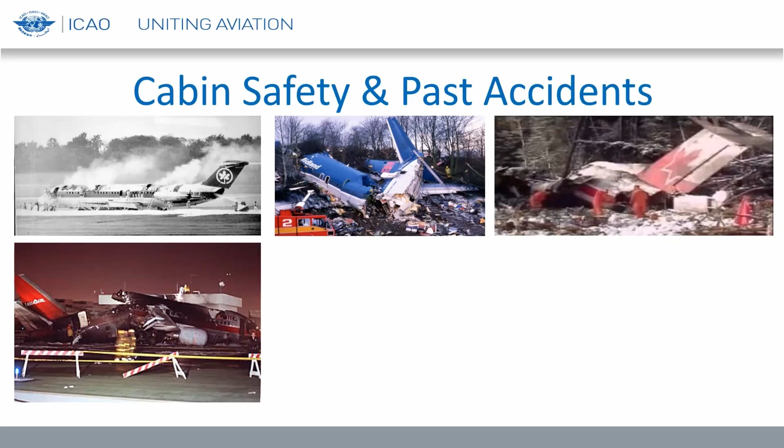2005, and a 737 which failed to pressurize due to maintenance issues. As the aircraft climbed, the cabin altitude warning horn sounded. The flight crew misidentified the warning as a takeoff configuration warning and attempted to troubleshoot. Meanwhile, the oxygen masks in the cabin automatically deployed, and it is presumed that cabin crew became aware of the decompression. However, the aircraft continued to climb, and both flight crew members succumbed to hypoxia. The aircraft continued to fly on autopilot until it suffered from fuel exhaustion and crashed, and there were no survivors, and the aircraft was destroyed.

It should be noted that cabin crew are, or should be, trained to know that a decompression is followed by a rapid descent. The fact that the aircraft kept climbing should have been a clear indication to them that there was a problem. In fact, the investigation concluded that one of the factors that could have contributed to the accident was the lack of cabin crew procedures to address events involving loss of pressurization and continuation of the climb despite oxygen mask deployment. As a follow-up to the accident, EASA issued Safety Information Bulletin 2009-33, which recommends that operations manuals should be reviewed and amended to address such procedures. And number 6, please.

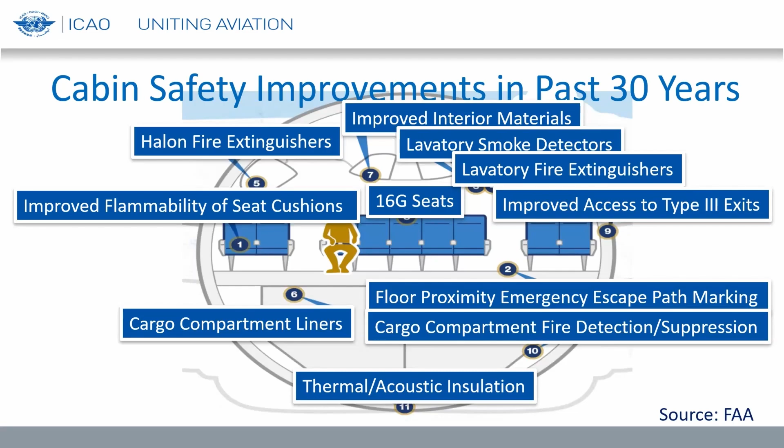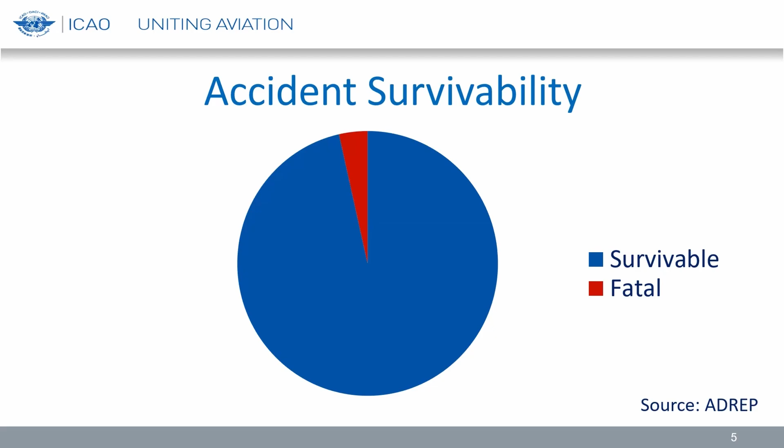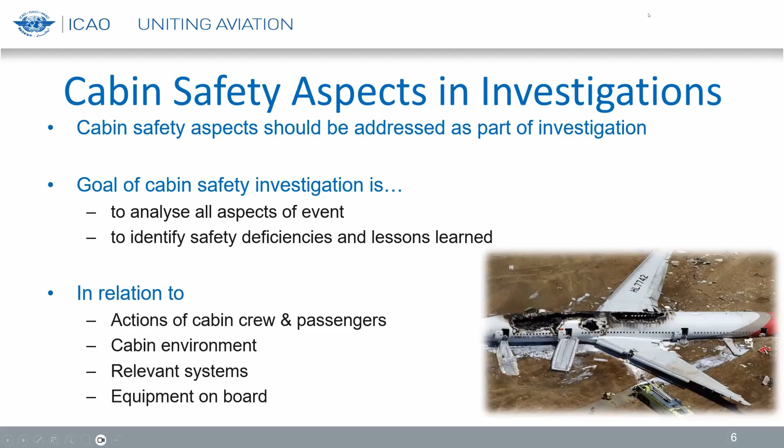So, the cabin safety aspects and investigations. Cabin safety aspects should be addressed as part of the investigation. Approaching an investigation using a systems approach encompasses all affected areas of an investigation, of which cabin safety is an important element. And the analysis of cabin safety related aspects can provide valuable insight into issues such as systems engineering and design, human psychology, human factors and all of its subfields such as ergonomics and biomechanics, human performance and limitations, human cognition, behavioral psychology, organizational psychology, learning psychology, and more relating to cabin crew, passengers, the aircraft and its systems and equipment, and any limitations.

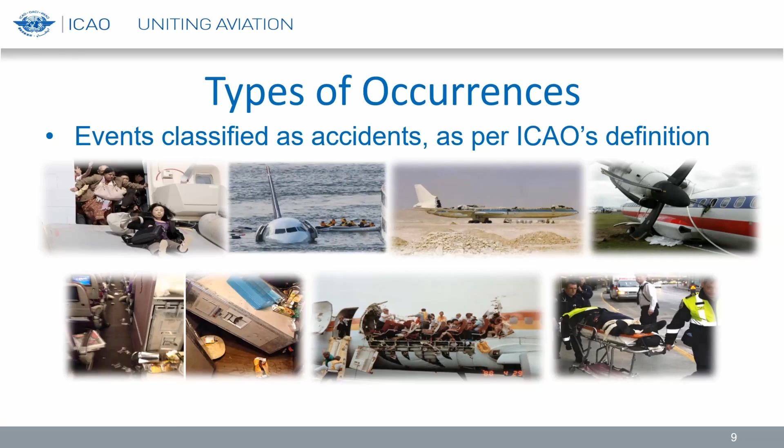So documentation refers to the occurrence specific documentation from the following sources. So this is the collection of the relevant documentation from the operator, the state of the operator, and other sources. For example, the aerodrome where the accident occurred. Next slide, please.

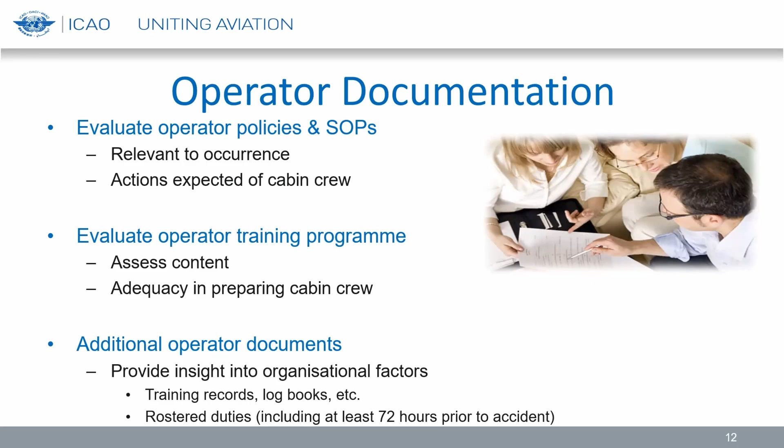The document also relates, in terms of operator documentation, the need of the cabin investigator to evaluate the air operator policies and the standard operating procedures. So this would be documents relevant to the occurrence and actions expected of the crew. So the training programs, for example, the evaluation of the operator training program to assess the content and the adequacy in preparing the cabin crew, and additional operator documents, which may provide insight into organizational factors such as training records, logbooks, and the rostered duties. Next slide, please.

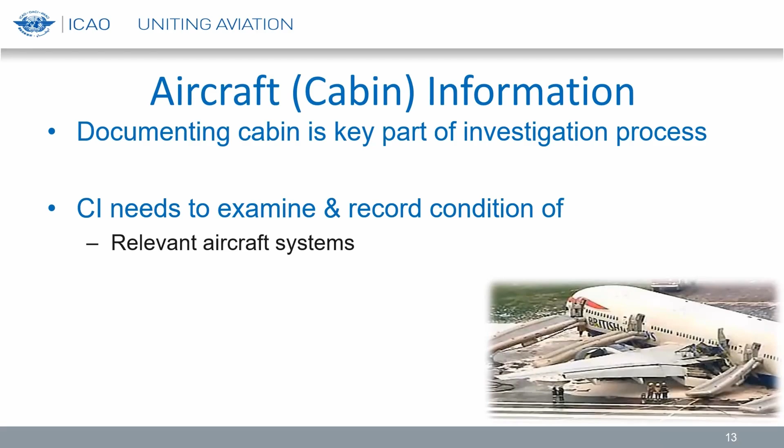In terms of aircraft cabin information, this is the collection and the documentation of the cabin as a key part of the investigation process. So the cabin investigator needs to examine and record the condition of the relevant aircraft systems, safety and emergency equipment, and the cabin in general. And we'll move to the next slide, please.

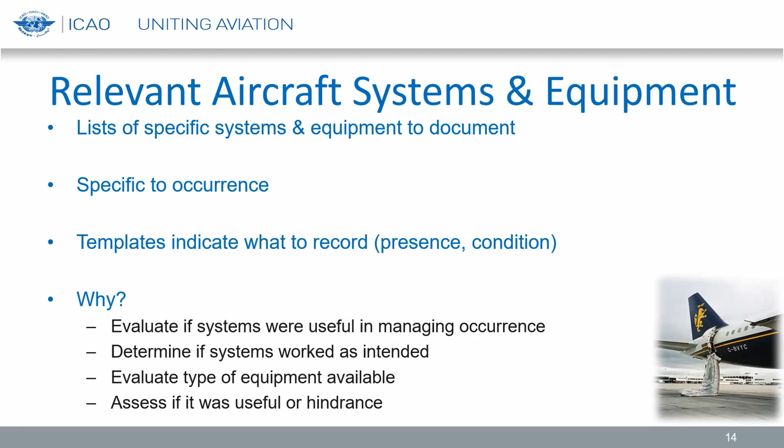And in terms of the relevant aircraft systems and equipment, this chapter lists the specific systems and equipment to document, the specific information related to the occurrence, and the templates of what to record, such as the presence and condition, and why. And the why part is to evaluate if the systems were useful in managing the occurrence, determine if the systems worked as intended, evaluate the type of equipment available, and assess if it was useful or a hindrance.

So the analysis should focus on the reasons for failure, damage, or malfunction of structures, systems, equipment, and/or components, and evaluate how they affected the ability of the crew members to carry out their duties and responsibilities, and the survivability of occupants involved in the occurrence. And this process may require testing of parts. And the question that's often asked is, did the equipment or system operate as intended? Next slide, please.

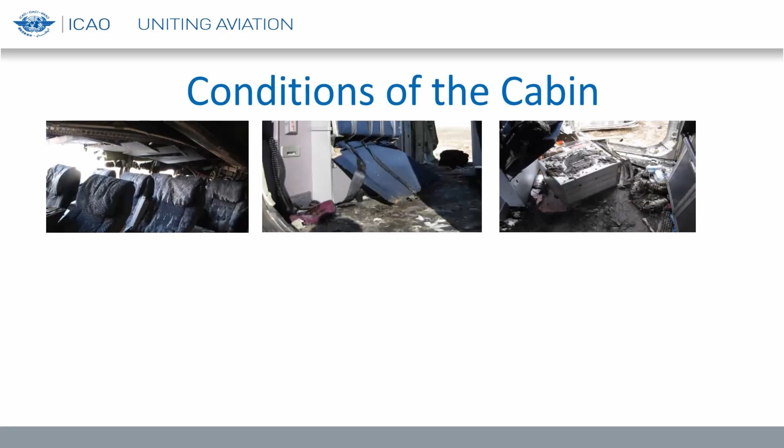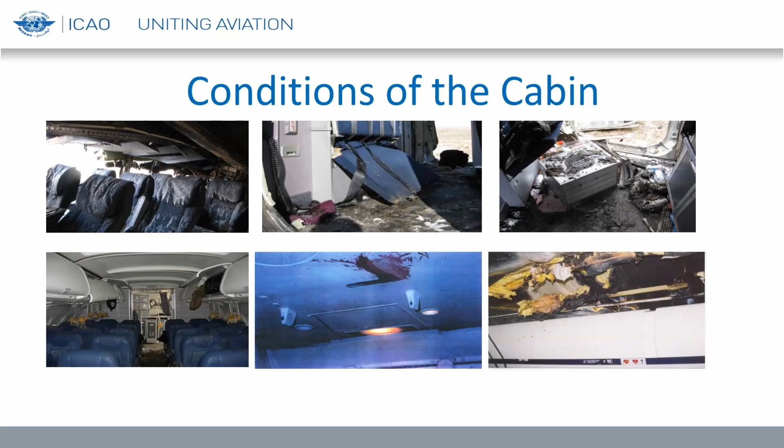The conditions of the cabin. For the conditions listed in the cabin in Doc 10062, the cabin investigator should record the presence or condition, if there were failed or damaged components, serviceable, and/or if the components worked normally, and the part and serial number of any affected equipment as well. And again, the reason why is to evaluate the reason for failures or damage of that specific piece of equipment or system, how this impacted the survival of occupants, how it may have contributed to injuries, and whether or not the system or equipment affected the ability of the occupants to evacuate. Next slide, please.

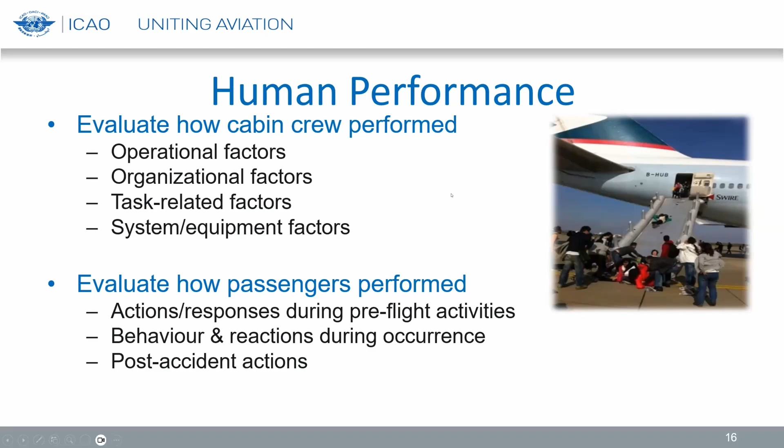So human performance evaluates how the cabin crew performed and how the passengers performed. So the operational factors include aspects such as the cabin crew's knowledge of systems and equipment, their experience level and proficiency, crew compatibility, supervision, command, and control of passengers' action, and then the passengers' actions and responses during pre-flight activities, for example, whether the passengers listened to safety briefings or actually took out the safety feature card,

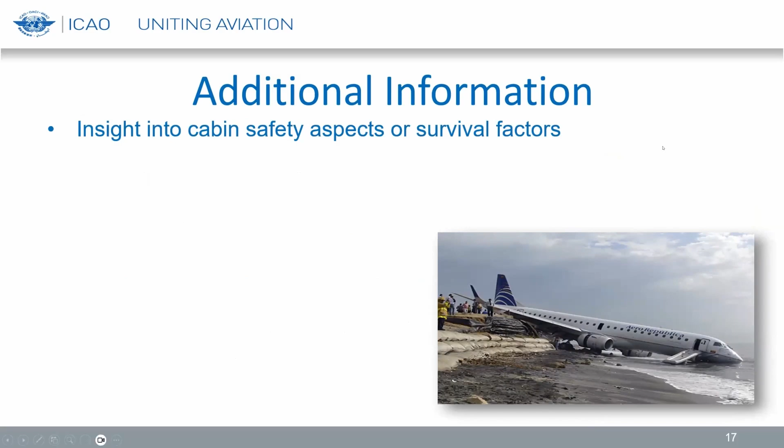the passengers' behaviors and reactions during the occurrence themselves. And one of the previous examples at the beginning of this presentation was the fact that passengers ended up taking their carry-on baggage and subsequently slowed down the evacuation process. Any difficulty that passengers had in opening exits, getting to exits, and post-accident actions, such as responses to instructions from personnel, such as rescue and firefighting personnel.

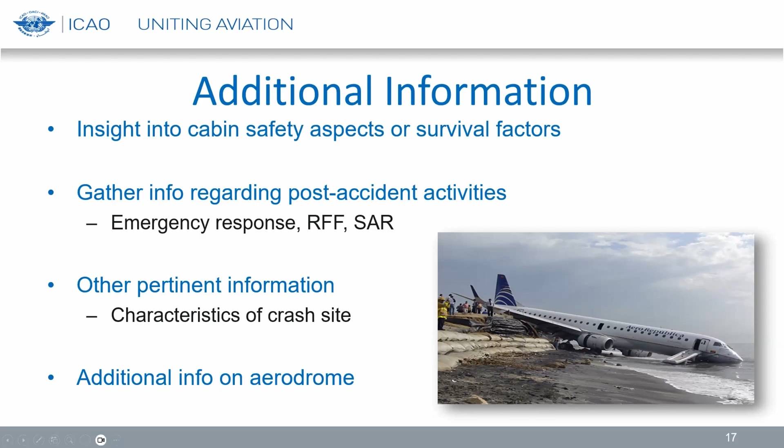So, additional information. The purpose of any additional information as the underpinnings of the investigation process is to gather any insight into cabin safety aspects or survival factors. So gathering information on the post-accident activities. So this may be emergency response, search and rescue. The analysis should examine how, for example, the rescue services responded to and managed the occurrence. If search and rescue operations were undertaken following the accident, the analysis should also focus on the operations, the response, and how the incident was actually managed as well.

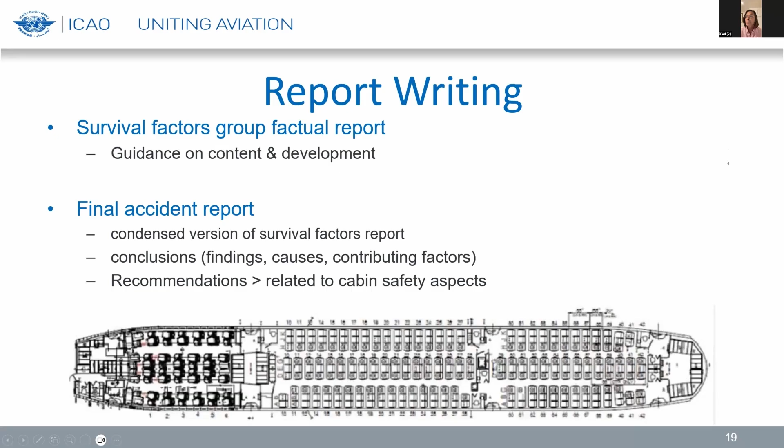And the document also contains how to write the report, what should be in the report, and the process for the actual drafting of the report as well, and the fact that it needs to be factual. I'm cognizant here that this is taking a little longer than we originally planned, so I'm going to keep moving. And then finally, this document also contains a complete chapter for operators on incident investigation.

So this chapter focuses on investigation of incidents which do not meet the ICAO definition of an accident and may not require a formal investigation by the state of occurrence. But incidents can provide evidence of hazards or deficiencies within the aviation system and should not be overlooked. And there are several examples of these provided in that chapter as well.

And next slide, please. So as I wrap this up, I thought I would end by closing with the words of one of my mentors. When I originally started in aviation, I came in as a flight attendant and then started at Transport Canada as an inspector with cabin safety standards. So some of the names today, I'm like, we've been around a very long time. And one of my mentors when I started, her words are actually on the Transport Canada website as well. And I thought I'd end with that, the summation of cabin safety's goal.

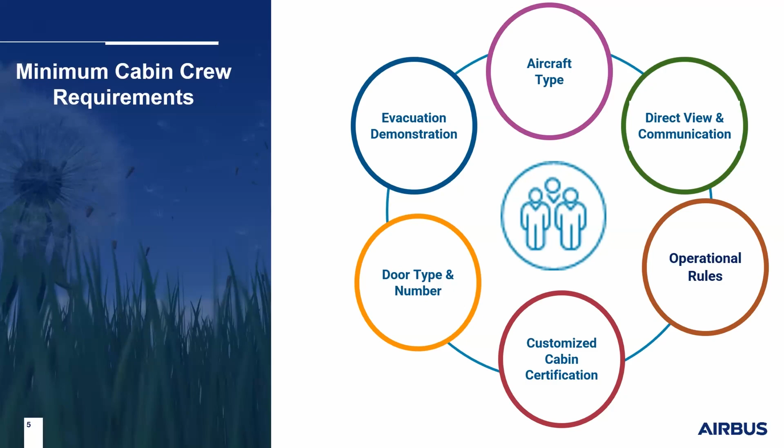Can you move forward again?

Thank you. For the type certification, the TC, Airbus has to demonstrate that an aircraft can be evacuated within 90 seconds, in accordance with EASA CS 25.803 emergency evacuation. This evacuation demonstration is performed with the minimum required crew for the cabin and the cockpit, based on the type of the exit and the maximum number of passengers distributed in the cabin. The maximum seating capacity is, of course, limited by the available space in the cabin and by the type and the number of exits.

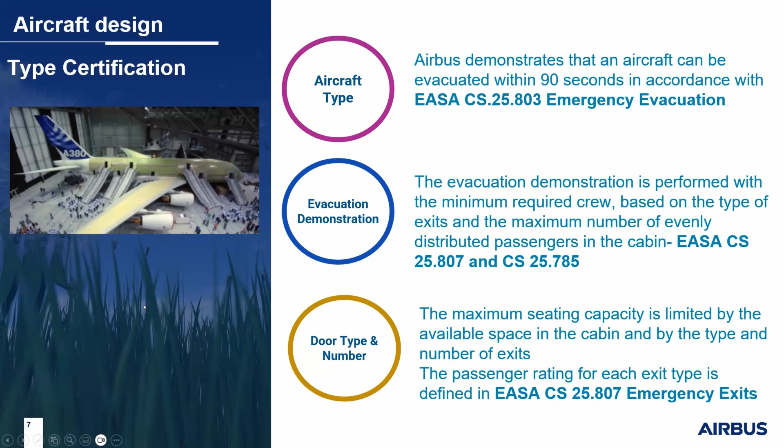The type of door may also influence the minimum number of cabin crew. As an example, for type A exit, one cabin crew must be positioned in the cabin attendant seat, the CAS, adjacent to the exit, so they can reach the exit before any passenger. For type 1 exits, it's slightly different. One cabin crew must be positioned in the CAS installed next to the exit.

When the aircraft is certified, as a result of the TC, the type certificate, the aircraft is provided with a type certificate datasheet, the TCDS. This TCDS will record the maximum passenger seating capacity for a given model or aircraft, and as well the minimum cabin crew as it has been demonstrated during the evacuation demonstration.

Next slide, please. As you may know, aircraft cabins can be highly customized. So, during the customization process, the operator should select a cabin layout that complies with the TCDS. What does it mean? That means that the number of passenger seats must not exceed the approved maximum number of passenger seats, and the number of cabin crew must be equal to or above the number approved during the type certification. We will see that in certain cases, the minimum cabin crew may be higher than the number defined in the TCDS, and this higher number will come from the individual cabin certification.

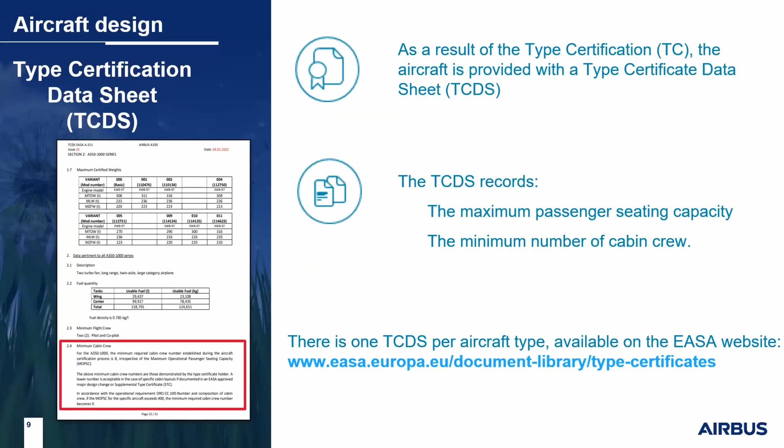Can you move forward? I think we swapped two slides. Can you go back, please? So, sorry for that. Can you move forward? Okay. Sorry. Okay, can you move forward? Sorry for that again.

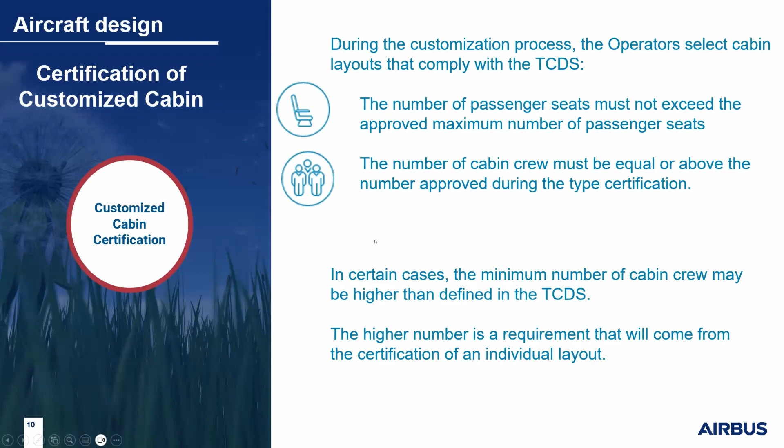In addition, there are certain items installed that may require amendments to the regulation, and these amendments are also published in the TCDS. As an example, additional cabin crew may be required, which will increase the minimum required cabin crew. This is the case, for example, for type A+ exits, where a third cabin crew is required for a pair of type A+ exits.

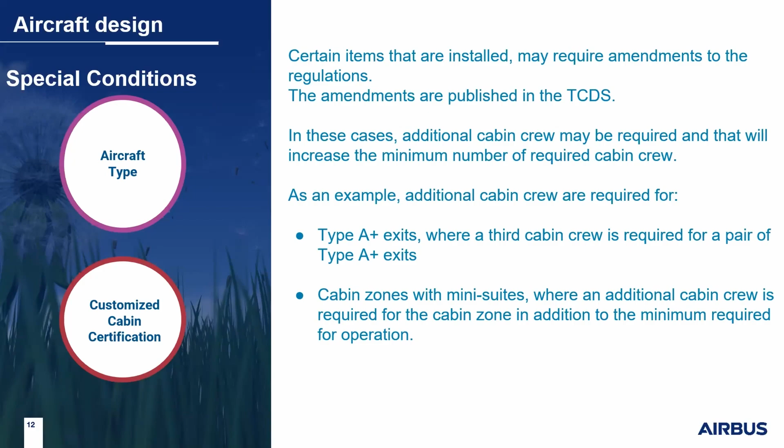So I will explain. Airbus has succeeded in certifying exits with a rating of 120 passengers instead of 110 for a normal type A exit. In that case, we have demonstrated that the third cabin crew is needed to complete the evacuation. That's why for type A+ exits with a rating of 120, we will have an extra cabin crew, and this will impact the minimum cabin crew. As well, in certain regulations, cabin zones with mini suites have an additional cabin crew required for the zone because of the workload. Can you move forward, please?

One of the questions we often receive from the operator is, can we reduce the minimum number of cabin crew? The answer is yes, in theory, for specific cabin layout. The minimum number of cabin crew may be reduced permanently, but this will be based on appropriate demonstration, because during the corresponding certification exercise, we could have an evacuation analysis requested or test or combination of both.

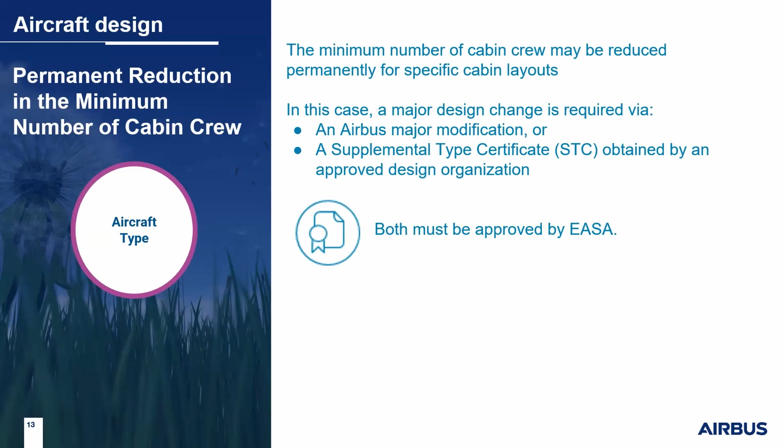In this case, this will be a major change to the design. And this major change will be required via an Airbus major modification or a supplemental type certificate obtained by an approved design organization. At the end, both must be approved by the EASA.

Can you move forward? The operator, on their side, should comply with the ORO.CC.100, stating the minimum number of cabin crew shall be the greatest among the following. So the number of cabin crew established during the aircraft certification process, in accordance with the applicable certification specification. That means the number which is written on the TCDS, or one cabin crew member every 50 or fraction of 50 passenger seats installed on the same deck of the aircraft.

That means, as an example, that for an aircraft with 4 pair of doors and a seating capacity above 400, the minimum cabin crew will be increased. Can you move forward, please?

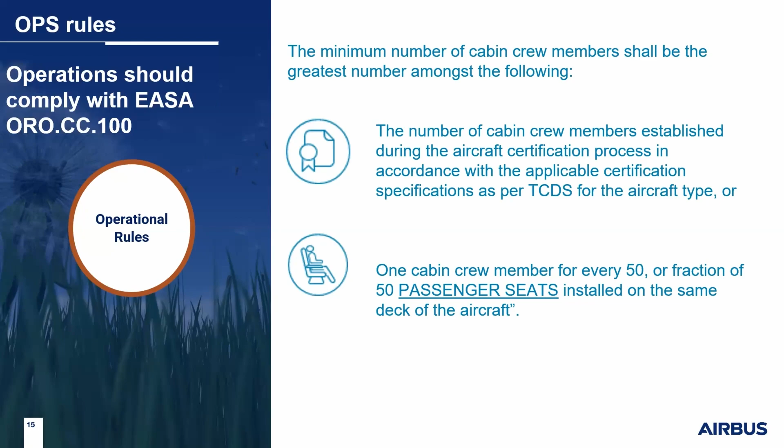In operation, the minimum number of cabin crew may be reduced in accordance with the EASA ORO.CC.205. As an example, it could be reduced in unforeseen circumstances when cabin crew is incapacitated or unavailable. It should be noted that any reduction in cabin crew operation must be reported by the airline to their National Aviation Authority. Here, once again, this is operator responsibility to ensure that first, an equivalent level of safety is achieved.

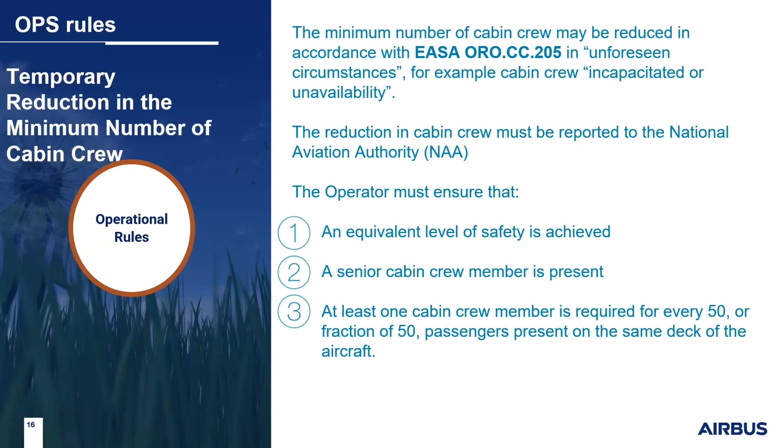A senior cabin crew member is always present on board, and at least one cabin crew member is required for every 50 or fraction of 50 passengers present on the same deck.

Now we'll go through an example. This is an example of a typical twin aisle layout. It's a 3-class layout with 253 passenger seats installed. So as per the Airbus policy and reflected in the TCDS, there is one cabin crew for each door at floor level. So in that case, the minimum cabin crew will be 8. But due to the cabin customization, an extra cabin crew is required at door 2R to comply with the direct view. Therefore, in that case, the minimum cabin crew for this layout will be 9.

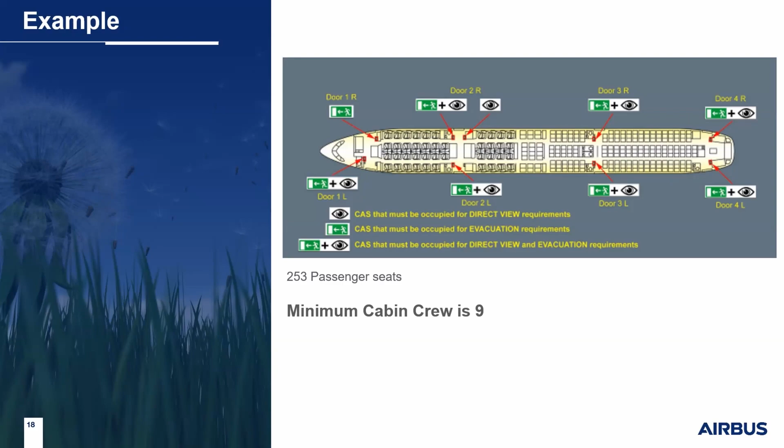So now it's time to conclude this short presentation. With this presentation, we hope that it's now clear how the minimum cabin crew is calculated, but also the direct impact that this number may have on cabin crew performance during an emergency evacuation. Bearing in mind that minimum cabin crew is a key element in cabin safety.

So if you want further detail, we encourage you to have a look on the Airbus WIN platform. This is an open platform that is produced by Airbus, where you can find various presentations on very interesting cabin subjects and flight ops subjects, and this will include the minimum cabin crew.

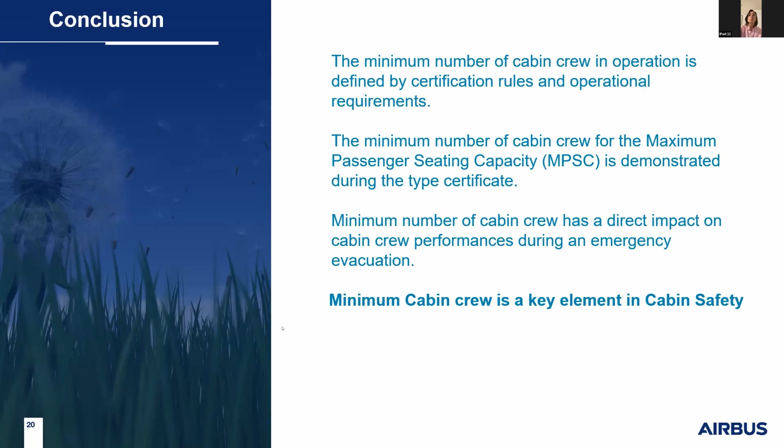Thank you, Jean-Paul. We do have one question, if you have the time for: do you think that airlines focus more on briefing passengers on how to operate the overwing exits, but don't put much focus on what should be done after going out and how to help directing other passengers? You mean you are talking about the briefing? Yes. The briefing is not a manufacturer issue, to be honest, because as per the ops, the briefing is mandatory to be done, but it's a pure airline issue.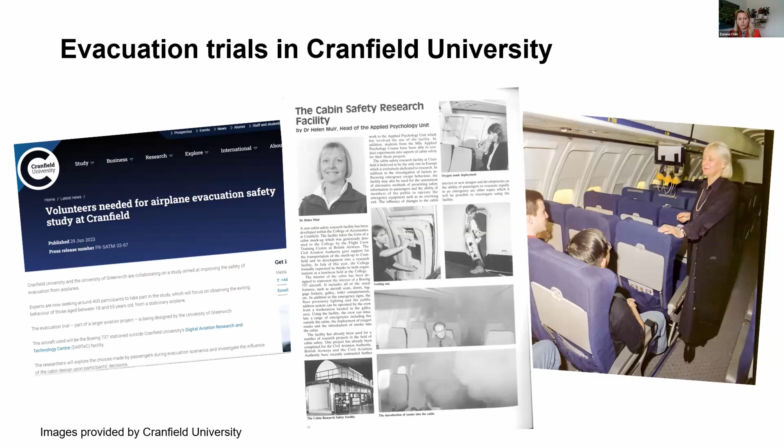If you can move to the next slide, please. This is some of the how, why, and what. If you start with why, it's very much about why would you run evacuation trials? What's the purpose? Most of the time the main purpose would be safety and perhaps improvement of safety, done by testing existing procedures, how effective they are, and what improvements can be made. Testing of new procedures, introduction of new technologies, new cabin layouts and new types of planes, explanation and testing of human behavior, how humans behave in particular setups during different situations. And as previously mentioned, accident investigations: running a simulation based on a previous accident can provide us with further explanations and lessons learned that are relevant not just for now, but for the future.

The next point to consider is perhaps the what. Same as with any project, it would be budget, location, facilities. It's good to consider what facilities are already available, if there is a facility that would already be suitable for running the trials, or if there is a need for a new one to be built. External and internal communication between the stakeholders is incredibly important. Things like insurance, ethical approval, GDPR, how you are going to deal with people's personal details, risk assessments, all of that needs to be in place. Then we move on to recruitment of participants. What rewards and incentives are you going to use to entice participation in your trials? What systems and procedures do you need in place to run evacuation trials? And essentially what the timeline for running the trials would be.

If you bear with me a minute. And I hope you can all see my slide.

So I'm just going to start off with a brief introduction as to who we are. I basically started the Fire Safety Engineering Group back in 1986, and this was a direct result of the Manchester Boeing 737 fire. Today, we are a team of about 18 full-time researchers, and we're a combination of fire engineers, computational fluid dynamics specialists, mathematicians, psychologists, physicists, and software engineers.

And what we do is we study how people react in emergency situations, primarily during evacuation, in a whole range of different types of enclosures, including aircraft, of course, buildings, ships, trains, basically anything that contains people. And we study the way people react and behave. We use this knowledge to build computer simulation tools, which we can then use to help to design safer environments. And that's what we've been doing for quite some time.

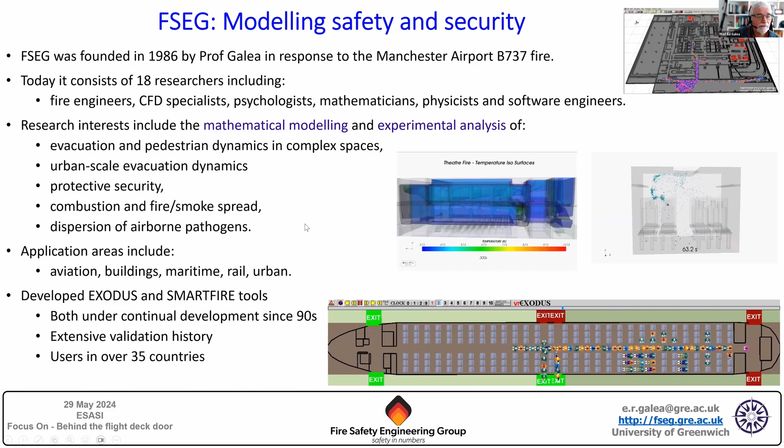And a lot of our work was done in collaboration with Cranfield on aviation, in particular with Professor Helen Muir, who we worked with for many years. What I want to show you here is just a collection of some of the experiments I've been involved with over the years. Some of these with Cranfield, for example, the bottom left is some work we did with Professor Muir, looking at how people would evacuate from an upper deck of something like an A380.

The middle top is showing some evacuation trials, again, we did with Professor Muir at Cranfield University, looking at how people would evacuate from the upper deck of an A380 going down to the lower deck to use the lower deck slides. This was part of an EU-funded project called VERRES. The top right shows you some more experimental work we were doing, this time with Airbus, and here we were looking at how people would react in a smoke-filled environment and how they would try to find the way out of an aircraft.

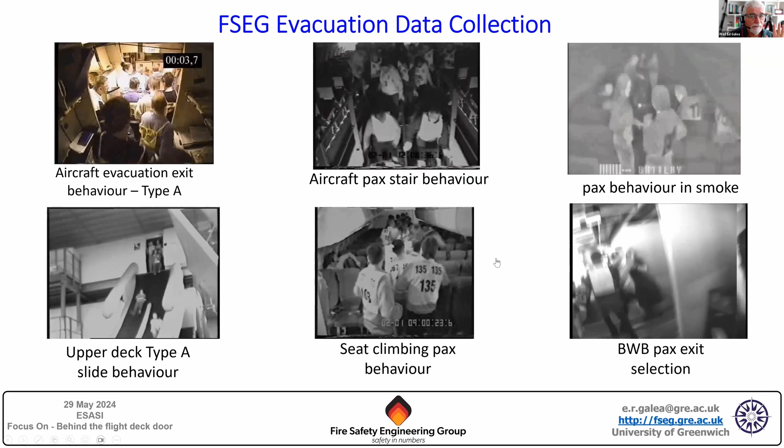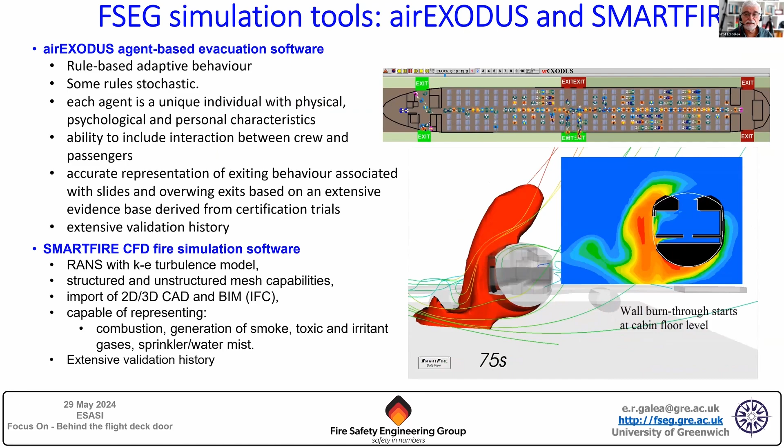And the bottom right is an example of some evacuation work we did again with Cranfield and Professor Muir, and I'm going to talk about that in my next few slides. So I mentioned we have software tools. We have the airEXODUS software tool that simulates, predicts how passengers behave in emergency situations, not just certification tests, but real accidents where you can involve fire. For example, we have a fire simulation tool called SMARTFIRE, which simulates how the fire spreads. We can link the two together, and in our simulation, we can expose the agents to the developing fire environment so that we can see how they would react and behave in a fire situation.

So what I want to move on to for my last couple of slides is basically show you some work we did with Airbus as part of an EU-funded project called NACRE. And here we were looking at how could you evacuate over 1,000 passengers from a blended wing body aircraft? And we did the first computer simulations of this and demonstrated that it was possible to get everyone off in 90 seconds. In this particular aircraft, we have something like 20 exits, and we had a minimum of 25 cabin crew, one cabin crew member at each of the floor level exits, plus 5 additional cabin crew in the cabin to direct traffic.

Now, one of the things we found in our computer simulations is that even though we could get everyone out in 90 seconds, the rear exit in the corner was highly underutilized, and it was not really attracting as many passengers as one would hope or expect. When we presented these results, there was some disbelief from Airbus and from the regulators, saying that they didn't believe that would happen, and so cast into question the credibility of the particular simulation here.

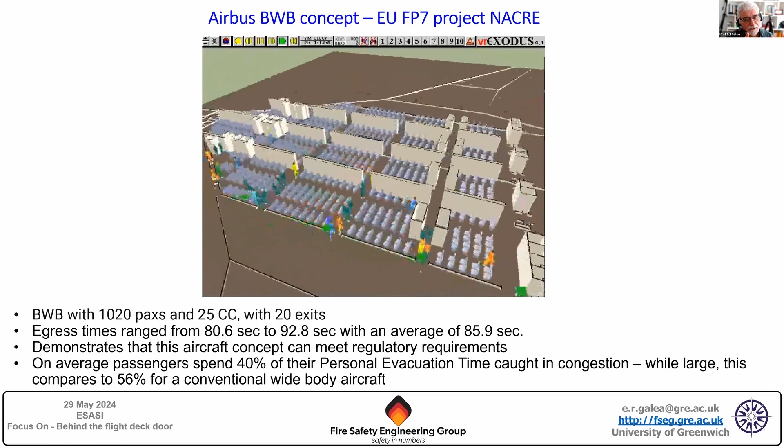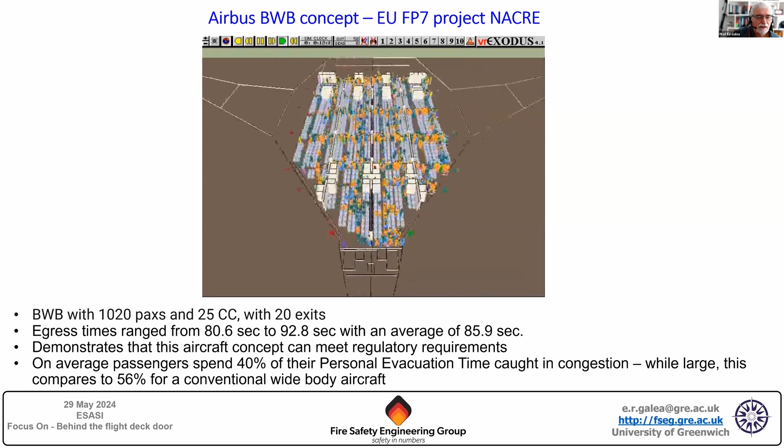And so what we did was, in collaboration with Cranfield and as part of this project, we built a simulator of this cabin, a partial simulator. I identified the part of the cabin that we needed to do and the types of experiments we needed to do. And then we ran those experiments to see what we would come up with. And so these were run at Cranfield University in collaboration with Professor Helen Muir.

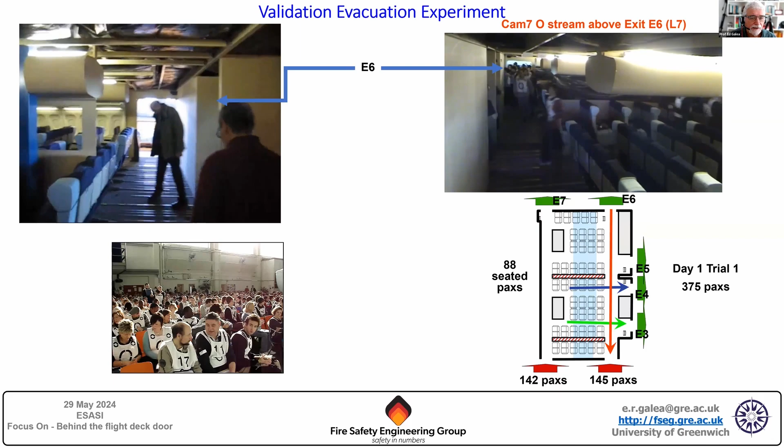And in my last slide, what I'm showing you here is a comparison of the model predictions against the experimental results. The blue columns show the number of passengers to leave by each of the exits, and the red columns show you what we measured in the experiment. And here we have the exit E6, where we were predicting very, very few passengers using that exit. And you can see the trend as you move away from this exit, you get more and more passengers using the various exits. And this is precisely what we found in the experiment.

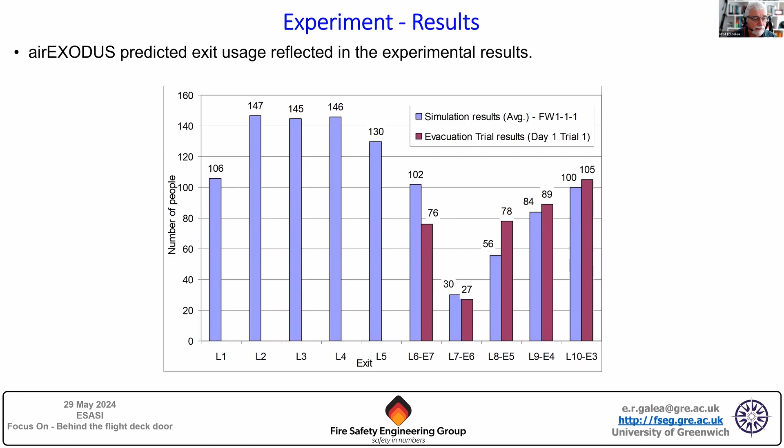So the experiment verified what the model was predicting, gave Airbus and the regulators much more confidence in the ability of the model to predict this very complicated situation. And basically it was thanks to the work we did with Professor Muir at Cranfield to collect the evidence to support what the model was actually predicting. That's the last of my slides. I hope I've given you an idea of some of the modeling work we've done and how we've worked with Professor Muir at Cranfield to collect evidence to support our modeling.

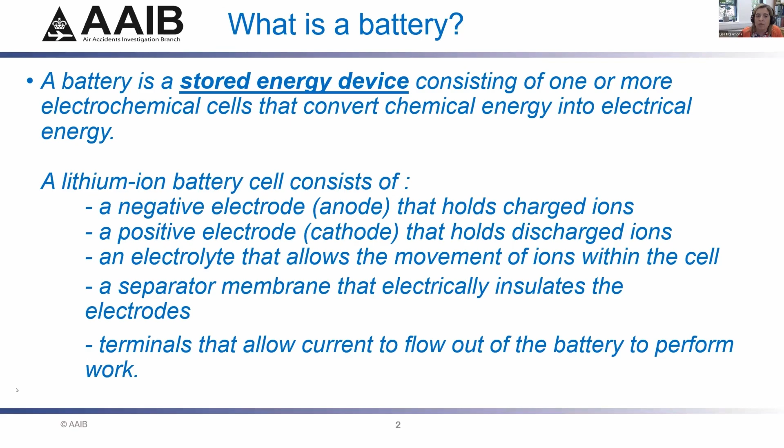So I'll start with the definition of a battery. A battery is essentially a stored energy device consisting of one or more electrochemical cells that convert chemical energy into electrical energy. In the case of a lithium ion cell, that will consist of a negative electrode known as the anode, a positive electrode known as the cathode, an electrolyte, typically a liquid, that allows movement of the ions within the battery cell, and a separator membrane that electrically insulates the electrodes inside the cell. They will be connected to terminals that allow current to flow out of the battery into an electrical circuit and perform work. Next slide, please.

Low maintenance requirements and high durability are other benefits of using lithium. But there are some limitations in that lithium is reactive and fragile, and when used in batteries, circuit protection is needed to maintain safe operation.

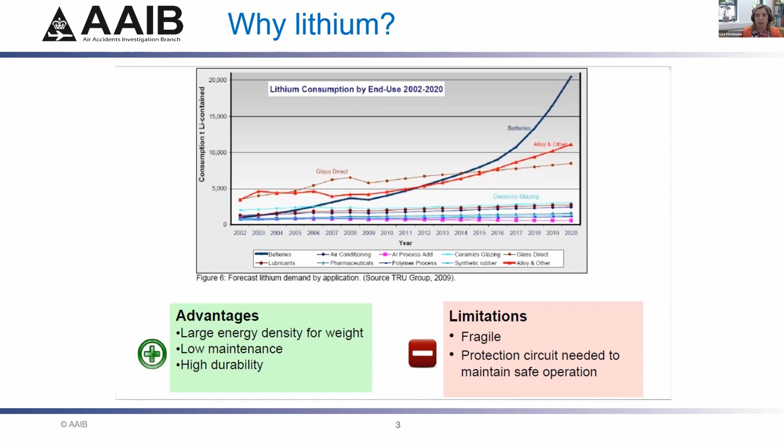Next slide, please. So just to provide a more specific definition, a lithium battery refers to a battery where the anode and cathode materials serve as a host for lithium ions. The battery stores and releases energy by moving these ions from the anode to the cathode when the battery is discharging, i.e. when it is providing power to a device, and from the cathode to the anode when the battery is being charged. Lithium-ion batteries are all rechargeable batteries.

A key component is a thin membrane known as a separator, and this is typically a thin polymer film which divides both sides of the cell to keep the cathode and the anode material from physically coming into contact with each other, and therefore providing electrical insulation, because otherwise this arrangement could result in a short circuit. The separator is a critical component in battery design. The cells also include liquid electrolyte, as we've alluded to. Next slide.

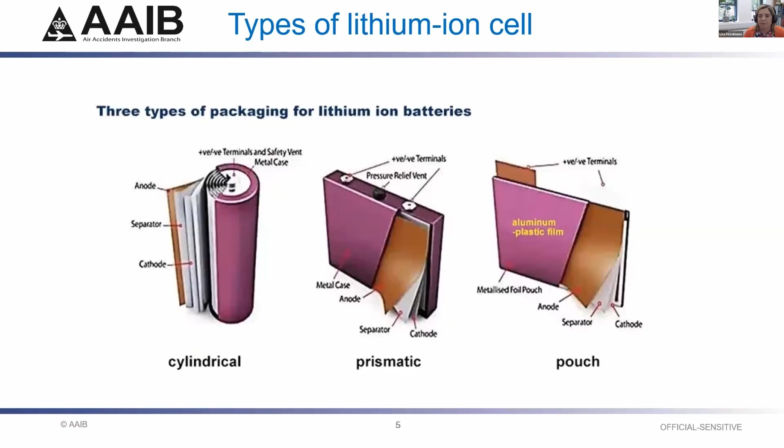However, when the lithium battery is being recharged, application of external electrical power will reverse the reaction. The ions will move in the opposite direction inside the cell, and the electrons will travel in the opposite direction through the circuit. The movement of ions through the electrolyte and electrons around the circuit are interconnected and interdependent processes. One cannot exist without the other. Next slide, please.

So that's all very well when batteries are working as intended, but there are many possible issues that can arise, and I think we're well aware of lithium battery failures. Lithium itself is an extremely reactive material, and there is often a lot of energy packed into a small space in a battery cell. The construction of the cells and their operation allows this energy to be extracted rapidly, which is good when that has been done in a controlled manner, and less good when that happens in an uncontrolled fashion.

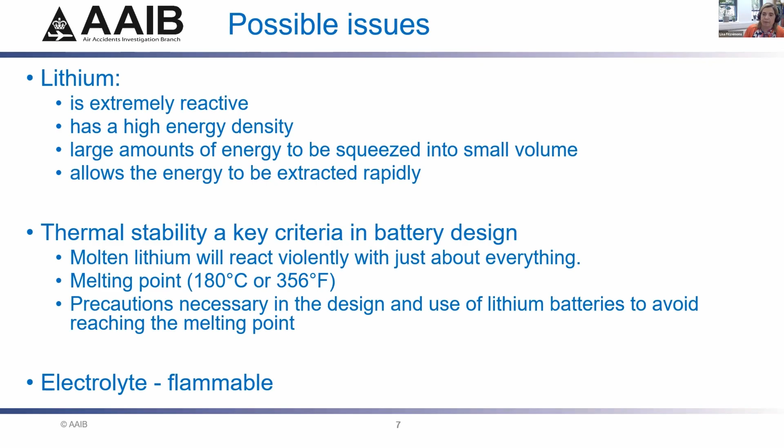If temperature was to increase within a lithium battery cell in such a way that it was unable to dissipate from the cell, a phenomenon known as thermal runaway will be encountered, in which the cell enters an uncontrollable self-heating state. The cell generates heat at a rate several times higher than it is able to dissipate heat. It can result in violent cell venting, where the contents of the battery are released as smoke, flammable gases, open flame, and often cells explode. Temperature rises can be in excess of 1000 degrees Celsius. Think of it as all of the energy in a battery cell being released at once in an instantaneous and uncontrolled fashion.

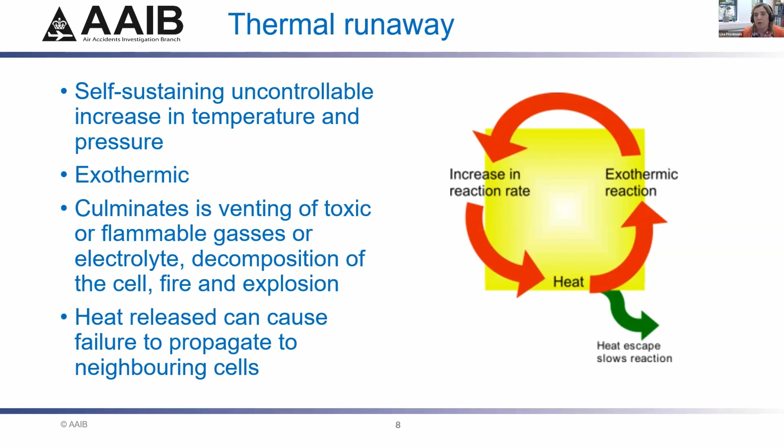Most battery packs are comprised of more than one cell. So if one cell goes into thermal runaway, it can cause a temperature increase in neighboring cells and propagate the thermal runaway into a cascading reaction throughout the battery pack. Next slide.

We mentioned the separator material earlier, and this is a thin and fragile material. Any degradation in that material can lead to a short circuit occurring if the separator is punctured, torn, compromised in any way, or melted due to excessive temperature rises. Some batteries have external protection devices to limit the potential for short circuits. However, examples have shown that these can be overcome.

Next click, please. If a battery was to be used in an aviation application, those batteries require to be subjected to various abuse testing to demonstrate how they behave in thermal runaway, whether the battery can be prevented going into a thermal runaway, and if it does enter a thermal runaway, how the effects of that runaway can be contained.

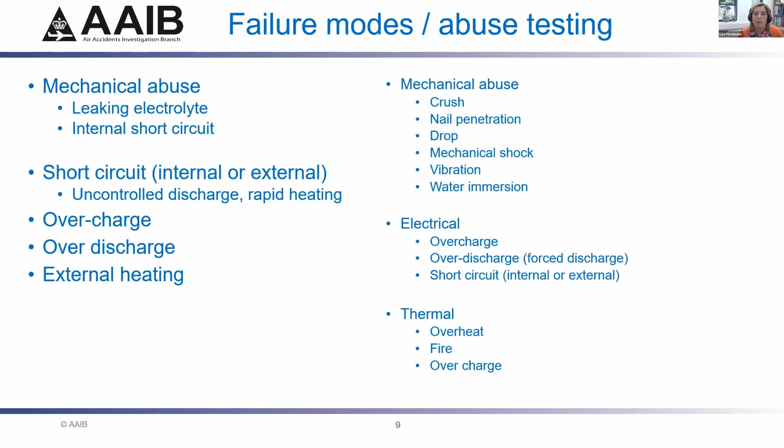So these tests will include crushing a battery cell, driving a nail through it, dropping it, subjecting it to mechanical vibration or shock, or immersing it in water. The cell may be over-discharged or overcharged, or it may be subjected to external sources of heat. But it's important to remember that many batteries that power our electronic personal devices may not be subjected to such rigorous testing. Next slide.

Whatever the type of failure, whether it be an internal or external short circuit or a charging or overcharging issue, all of these failure modes have a common feature that they lead to elevated temperature within a battery cell. This in turn generates a buildup of heat and gas. If the heat, as we said, can be dissipated, then it is possible to reach a safe outcome. If not, the cell will progress into thermal runaway. The battery will vent, rupture, and will experience a release of fire and flames and potential explosion.

As heat is the predominant characteristic in a thermal runaway reaction, it's perhaps not at all surprising that it is important when tackling a lithium battery fire to first and foremost reduce the heat and take any heat out of the reaction. Fire extinguishers can be used on open flame, but are typically ineffective in reducing the heat in a lithium battery fire, and the battery or device must be doused in water or other non-alcoholic fluid in order to do so. Next slide, please.

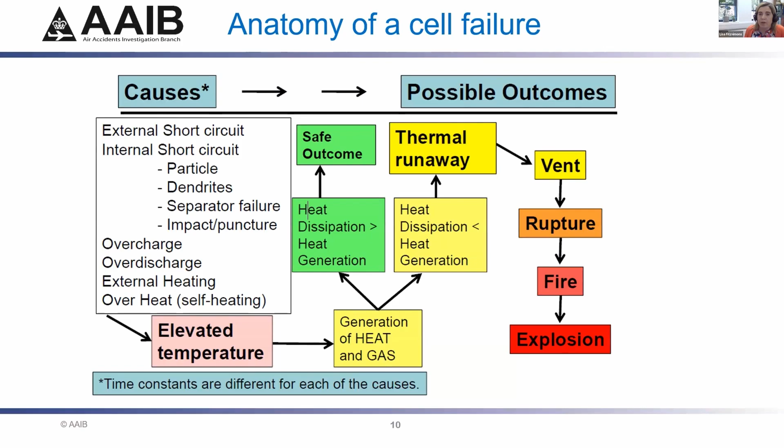Lithium batteries are not one thing. They come in different sizes, constructions, and chemical compositions. There are many different battery chemistries available, and the chemistry will dictate the specific nature of the electrochemical reaction that takes place in the cell. Lithium-ion cells are named after the chemical composition of the cathode. And if you hear terms such as lithium iron phosphate, lithium cobalt oxide, lithium manganese dioxide or oxide, this will give you an indication of the chemistry composition within the cell.

But whether the batteries are single or multi-cell, and whether a thermal runaway propagates between cells, any cell failure can propagate to surrounding flammable material and create a wider fire, which presents a challenge within the cabin in order to respond.

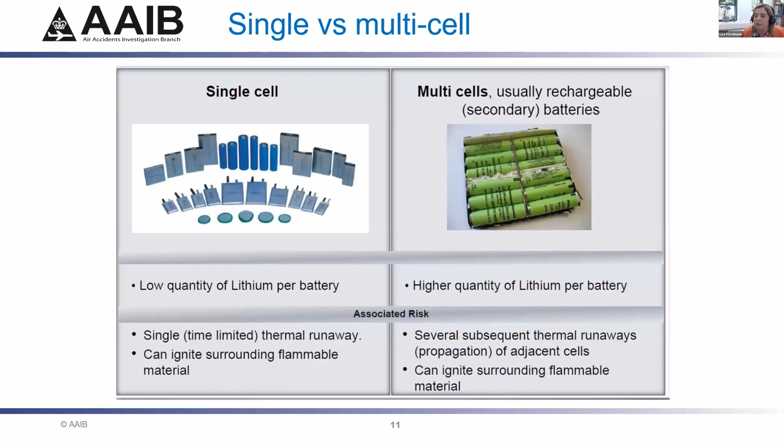The next few slides that I will share are taken from an Airbus document, which is probably now relatively out of date, and I include the images only for illustrative purposes. Any inaccuracies are mine and not those of Airbus. Next slide. This image gives you an indication of the typical types of device carried every day in aircraft cabins that may contain lithium-ion batteries: e-readers, laptops, tablets, cameras, headphones, power banks, smart bags, and AirTags.

There are many, many threats within the cabin in terms of lithium batteries. And in general, the larger the device, the larger the battery, and the greater the threat. Typical scenarios for an in-flight cabin fire involving a lithium-ion battery may be an overheating issue due to a battery being discarded or in a seat covered by blankets, pillows, and clothing, and unable to dissipate any heat, or a device being crushed in a movable seat if it becomes trapped in the seat mechanism.

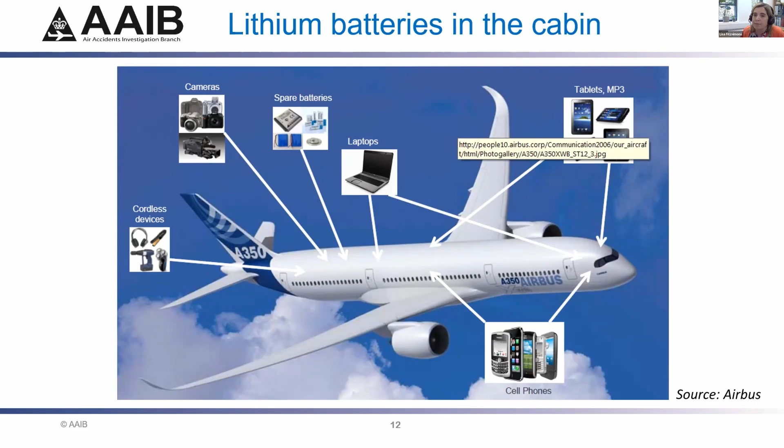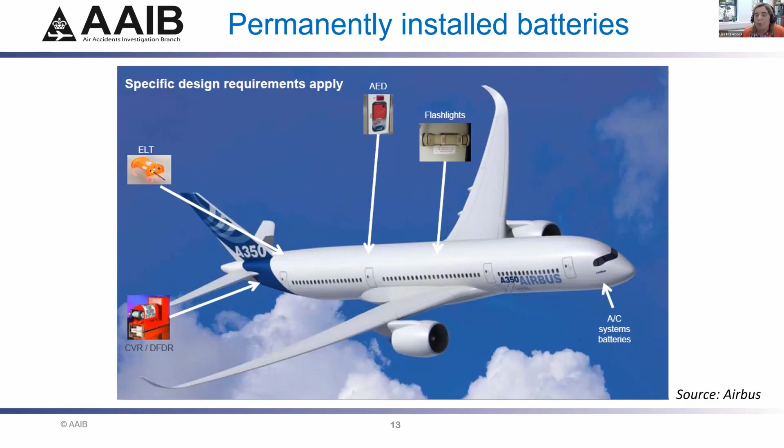Next slide. Many permanently installed items of equipment or portable items of equipment within an aircraft will be powered by lithium batteries. Typically, these are lithium metal batteries, which are non-rechargeable and have a different chemistry and energy density to lithium ion, but are equally susceptible to thermal runaway. Next slide.

And although the focus of today's presentation is predominantly on the cabin, we must not forget that many, many more lithium battery-powered devices may be carried in passenger luggage, in the hold, or as part of cargo shipments, and can represent a threat to the aircraft as well.

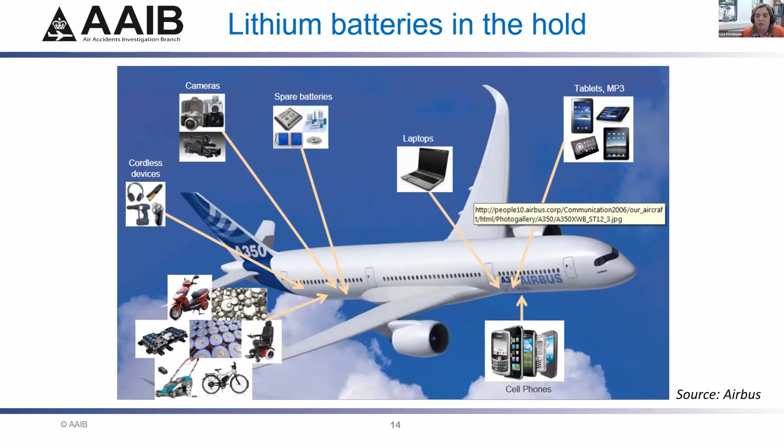We appreciate it. And now, dovetailing on your presentation, we'll be introducing Candace Kolander and her colleague, Mark Vanoff, from the Air Line Pilots Association. Candace currently provides staff coordination, liaison, and training support to ALPA's pilot assistance groups, which include Aeromedical, Canadian Pilot Assistance, Critical Incident Response, HIMS, Pilot Peer Support, and Professional Standards. She also assists ALPA staff and leadership on questions related to cabin safety issues.

Ms. Kolander has 28 years experience in a broad range of aviation issues spanning research to development of safety initiatives, regulations, and security-related activities. In 2017, Candace was appointed as the lead of the High Energy Fire Training Enhancement Working Group as a part of the FAA's Air Carrier Training Aviation Rulemaking Committee. The purpose of the group was to recommend updates and improvements to current training and guidance around response to high energy fires that can occur in occupied areas of the aircraft. The working group submitted their recommendations to the FAA at the end of 2018. She is assisted again by Mark Vanoff, who is a senior staff engineer at ALPA.

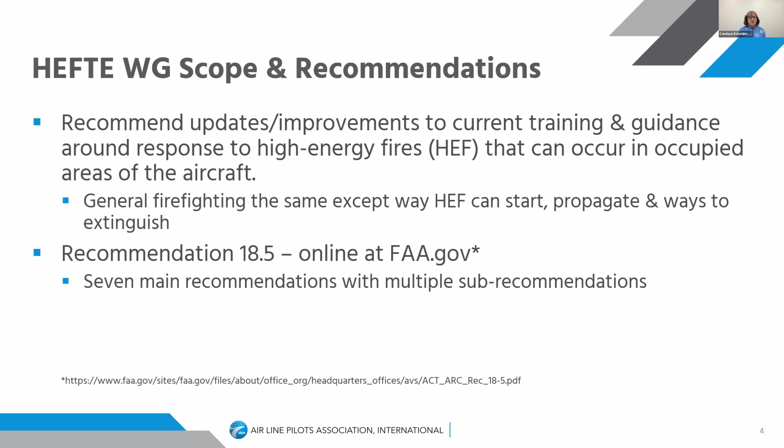And then we also put in some information related to flight deck electronic flight bags. A lot of the discussion was in the flight deck, we have some devices that are mounted, and some devices that aren't. So how do you go about making those type of changes? Where do you move them? How do you fight these fires? Again, all these recommendations are online, so I do recommend that you go in there. That is the way carriers should be changing and creating some of their training.

Next slide. So I'm not going to go through every single thing about this, but for the accident investigation world, I think one of the critical things that we need to understand is that accident investigation can actually drive change. In 2010, UPS Flight 6 was in Dubai, on takeoff. And that particular aircraft had approximately 81,000 bulk shipped batteries that caught on fire. So that aircraft was destroyed.

So from 2010, when this accident occurred, in 2016, we finally got a change in the ICAO Dangerous Goods panel that said any batteries being shipped in bulk could only be shipped at a 30% state of charge. You guys, this is a huge, huge victory for the industry. So it does show that change is possible from accident investigation.

And if you think about it, originally in 2006, 2007, when we were doing all of these changes, we didn't even have the number of electronic devices that we do today. Again, one of Lisa's graphs showed the increase in these types of devices.

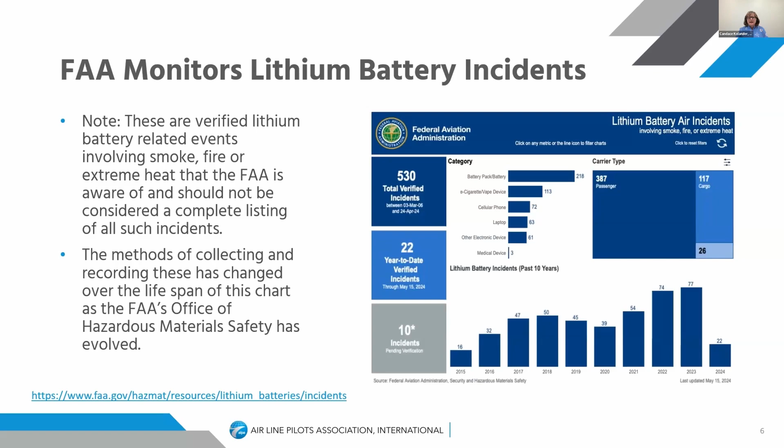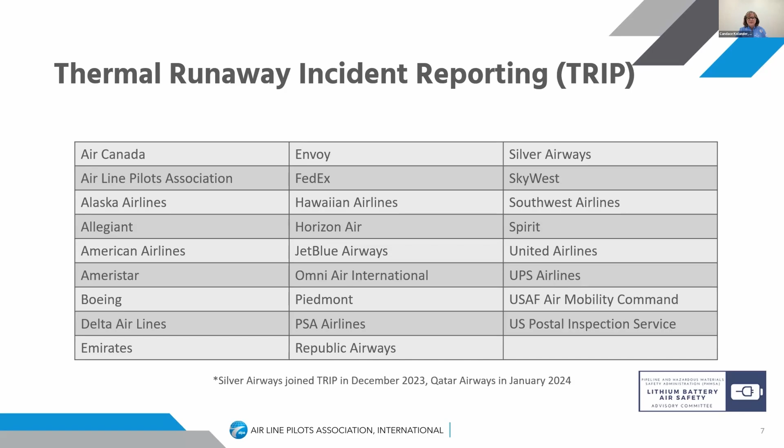So this is from TRIP data. The data from 2023 had 115 thermal incidents from 19 carriers. 90 of those incidents were in the cabin or in carry-on baggage. 12 incidents were in checked baggage. That database didn't show anything in the cargo hold, but they also collected information from cargo flights. On cargo-only flights, they had 13 incidents, but they didn't show any crew or occupant injuries.

So although the data is different, one thing you need to understand: the FAA data was mandatory reporting, and this is voluntary reporting. But it does give us really good information on what is happening in the cabin, or in this instance, in cargo flights. So next slide.

One of the things that I think is pretty interesting on this slide, again from the TRIP database, is if you look on the far left, this gives us a little bit more information on exactly what type of fires or incidents we are seeing. This one shows 35% of the thermal incidents involved e-cigarettes. That's the far left, with a number of 40.

As you drill down even more into that 40, in the information they had been able to gather, 18 of those incidents were actually from one particular manufacturer of that type of e-cigarette. So that allowed them to say, okay, you're having a hazard with your particular device.

So what this really shows is that there is a lot of information out there where you can break down the events. We still know from looking at some of this data that we're still getting 1 to 2 incidents a week in the US. Again, FAA data was collecting only what happened on the aircraft, whereas TRIP is curb to curb. Next slide, please.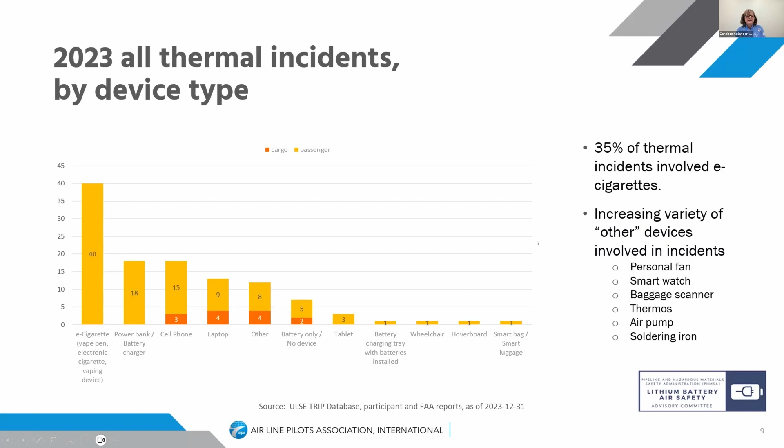And we saw how volatile and how explosive and different these ones were. Again, we're still doing the same information: locating the fire source, fight the fire, move the passengers, coordinate actions, monitor for reignition, and report it. But in the FAA guidance, there also wasn't a lot of information on how you respond to these. So we started to say, okay, if the carriers are gonna put these containment bags, kits, whatever you want to call them on board, we actually need to have some better guidance of what those products look like.

Next slide, please. Actually, one back. Sorry. The one thing I do want to point out on that last slide is at the very bottom, the PED fire videos on the FAA fire website, item number 5. There is a link to that. I really do highly suggest that if you are looking for information on the training, we have multiple videos on that website that were developed as part of the Hefty group and as a way to get more information out to individuals, operators, regulators, anyone, so that we could say that these are better training aspects. Next slide.

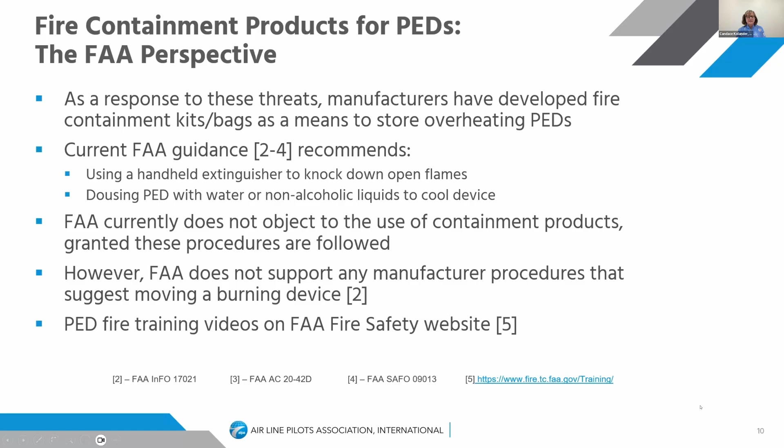So the containment bag considerations or products, whatever you want to call it, again, we originally saw way back then when we started the Hefty work that carriers were just putting these products on. And also one of the things that they weren't doing necessarily is hands-on training on their products. They were just putting them on and they would issue a memo or something like that. Just says, here's how you're going to fight these fires and here's how you take care of it. So we really needed additional information on what that looked like and how that was going to work.

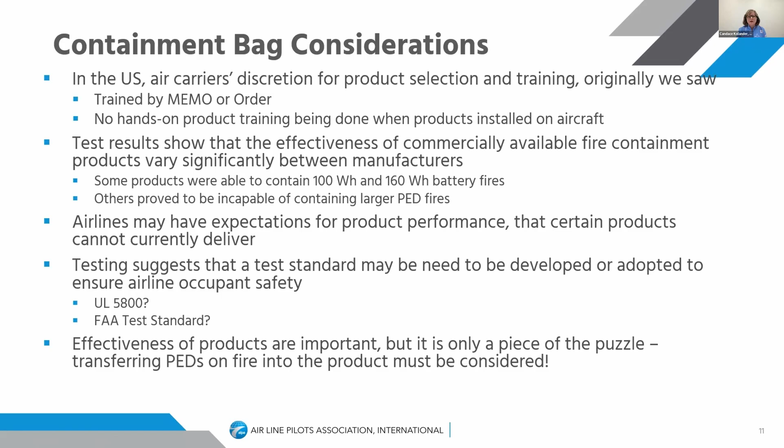So we also started working on some information for these containment bag considerations after that work. Again, it's all sort of building on everything that we saw. Again, going back to everything that Lisa presented to us, we didn't necessarily have back then. So we needed more additional information. The effectiveness of the products are important, but it's only a small part of the puzzle. So when you're doing your investigation, these are also going to be things you're probably going to look for. Next slide. I'm going to keep us on time.

So to wrap up, again, we looked a little bit at training aspects. All of these are various things that you can use as an investigator. It's going to help build your case. And it could create change like we saw at the ICAO DG panel. And then we also saw the different training enhancements for cabin crew, where we kept emphasizing that you had to have hands-on, you had to have a different understanding of what was going to happen. So all of these things can be used by the investigators to affect change.

But again, that just shows why it's important that when you do your investigation, you look at all of the aspects of it. Are they doing the hands-on training? What information are they using? Is there data collection? What is the carrier training on? And then what products are they using?

And with that, exactly on time. Thanks. Thanks very much, Candice, and apologies, I've had to step in for Joann. She's having a few power issues where she is, so I've just taken over for 1 minute.

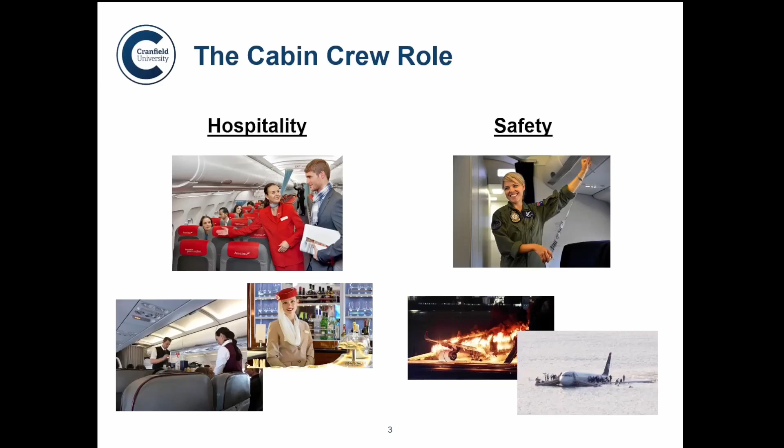So what we know from psychology and from human factors is that our performance is impacted by our well-being, our mental state. And in this research, we really wanted to look at how the well-being of cabin crew in Europe was impacted by exposure to disruptive passenger behaviour. Now, these behaviours can encompass a wide range of passenger non-compliance behaviours that are quite frequent and relatively moderate compared to these more worrisome forms of disruptive passenger behaviour that cabin crews may have to contend with, that take the form of verbal and sexual aggression and threats of violence.

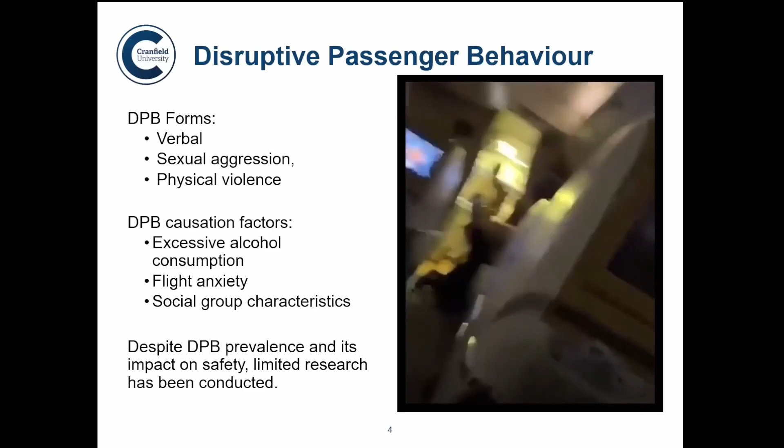And as a quick example, here's a video that was doing the rounds on Twitter and LinkedIn, where an intoxicated passenger flying between Dubai and Islamabad created this chaotic situation in flight. The cabin crew were physically assaulted, as you can see, and they were required to restrain the passenger in this instance.

So we do have some really good research that shows the factors that increase the likelihood of these behaviours occurring include things such as whether or not the passenger is intoxicated, as highlighted in this video. We also know that the level of anxiety the passenger is experiencing can change the likelihood of these behaviours. We also know that social group characteristics and the corresponding social norms of that individual can play a role as well.

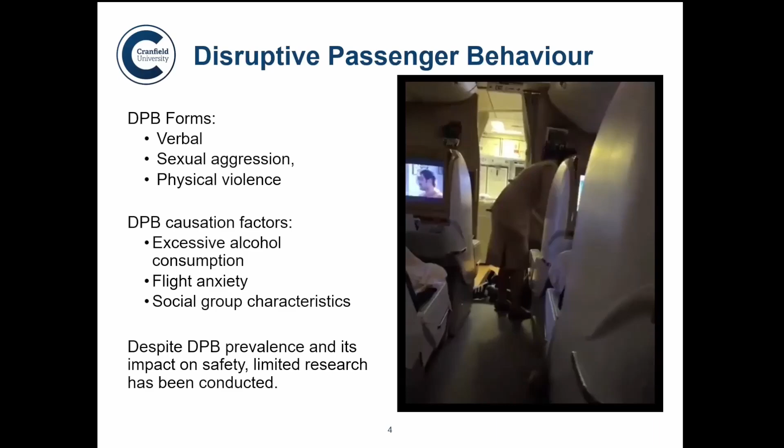And whilst we do have some really good research that describes the likelihood of these events, what remains quite sparse is our understanding of the impact of these behaviours on cabin crew, on their well-being particularly, which is unfortunate given the prevalence of disruptive passenger behaviour and its impact on safety. For example, according to EASA, the safety of commercial flights is jeopardised by disruptive passenger behaviours every 180 minutes, and approximately one flight per month is forced to conduct an emergency landing.

So the purpose of this research was to conduct an exploratory investigation to understand the prevalence of disruptive passenger behaviours in Europe and their impact on the safety and well-being of cabin crew.

Given the time that Alex was doing this research for his thesis, we were interested in novel stressors and contributors to these behaviours, particularly looking at COVID-19 given the time period. And lastly, what we wanted to do was to provide some solution-orientated recommendations that arose from the cabin crew themselves through speaking with them. And these recommendations were aimed to reduce the prevalence of disruptive passenger behaviours occurring, and also look at mitigating their impact should they occur upon cabin crew safety and well-being.

The work Alex conducted involved using interviews with a diverse range of European cabin crew from various European carriers. He did 24 interviews in all, and from those interviews Alex transcribed them, leaving us with approximately 800 minutes of audio to work with in our transcripts. And using these transcripts, we conducted a thematic analysis, which is a really popular method of analysing qualitative research. It allows you to provide a hierarchical thematic structure to what's been discussed in the interview, so you can identify what the prominent and reoccurring themes are that have come up through the discussions with different participants.

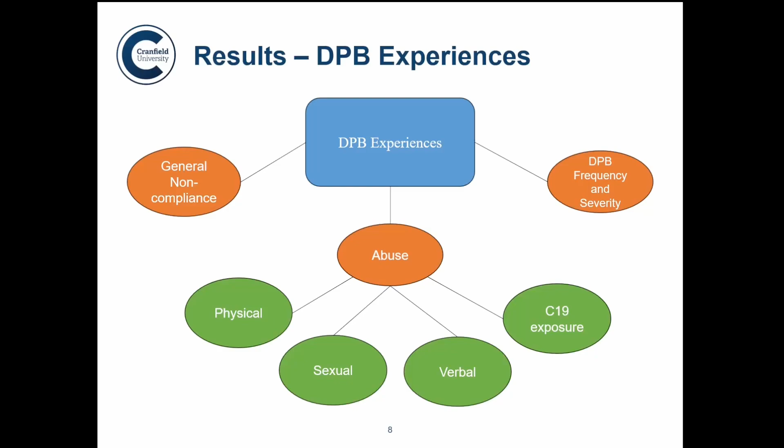And finally, what we were interested to hear from our participants, the cabin crew, was how they perceived the change in frequency of disruptive passenger behaviours to have been during the pandemic, or towards the end of the pandemic, when more people were flying. Here, all the participants were unanimous that the requirement placed on them to enforce pandemic policy had led to this sharp increase in disruptive passenger events that we've seen in various reports worldwide. However, what we did get was this mixed picture on the severity of the behaviours that were being encountered. Some said that behaviours had gotten a lot worse from passengers, or there'd not been much change at all. And in some cases, cabin crew had said the behaviours of the passengers had actually gotten better. This seemed largely to be due to the region in which cabin crew were flying.

Several drivers of disruptive passenger behaviour were noted, the first being intoxication of passengers, particularly occasions where passengers arrived on the aircraft already inebriated. Cabin crew talked about the higher levels of societal stress that the pandemic had created, and so had developed this situation where many passengers were coming on board already with these elevated levels of stress that primed some of them to express disruptive passenger behaviour.

The topic of perpetrator gender often arose when we were discussing disruptive passenger development with the cabin crew, and here the majority of participants voiced that males were far more likely to be perpetrators than females. Though there was this common trend from the participants that suggested that the different genders often expressed the difficult behaviours differently. For example, female disruptive passenger behaviour was more often characterised by non-compliance, whilst male problematic behaviours were often the more severe abusive and aggressive forms of disruptive passenger behaviour.

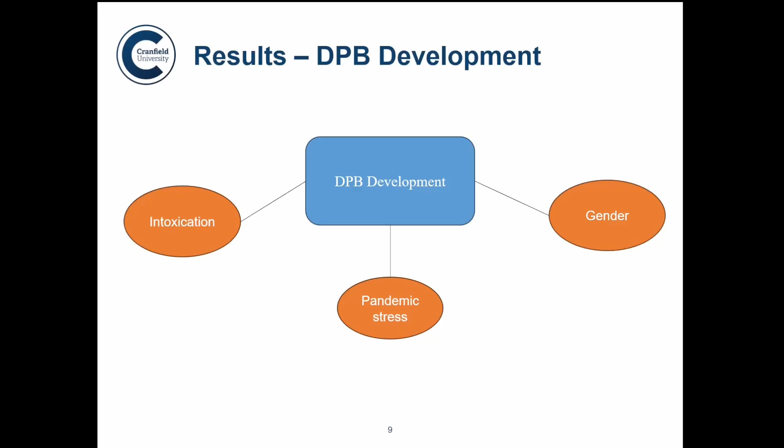And for the final theme, the crew shared their affective states during and after the incidents they had encountered, their perception of workplace safety, the coping strategies they used to process the unpleasant experiences, and the suggestions to deter or obviate future disruptive passenger events.

So in terms of emotional well-being, the affective states of cabin crew that were most commonly reported were anger, annoyance, fear, and powerlessness. Furthermore, the majority of cabin crew mentioned that negative emotions were experienced over a protracted period following the encounters. They were often taken back home or back to the hotel, and I was particularly worried by some reports from participants that sounded very much to me like PTSD-like episodes, whereby participants recounted experiences and moods and emotions that they had felt during the initial disruptive passenger event.

For personal safety, it was found that male cabin crew very infrequently felt that their personal safety was compromised, whereas female cabin crew mentioned times that they had been fearful for their personal safety, with one participant going as far to say that they only felt truly safe when an air marshal was present on their flight with them.

Participants reported using a range of adaptive and maladaptive coping strategies to deal with their feelings following disruptive passenger behaviour. The adaptive strategies were most often characterised by discussing their feelings with families and colleagues post-event. Interestingly, whilst all participants were aware of their airline's peer support systems, only one had used it out of the 24 we interviewed, though they did voice that this support had been very useful to them.

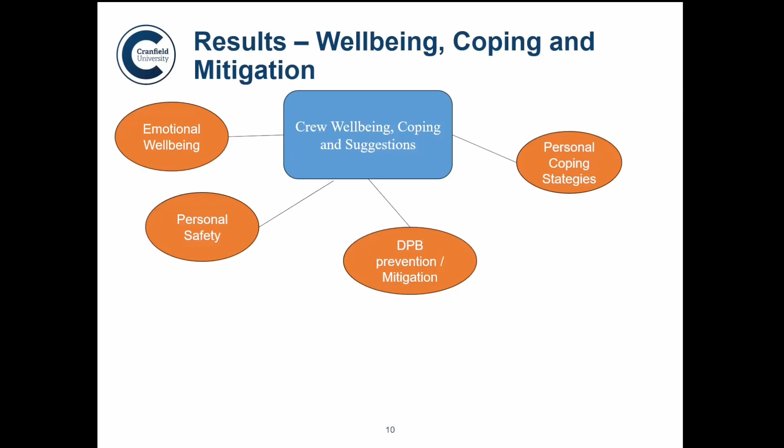The maladaptive coping strategies, the unhealthy coping strategies, were observed in the form of denial, repression, self-isolation, substance abuse, and the normalization of disruptive passenger behavior.

And the last sub-theme I'd like to talk about today is about prevention and mitigation, where participants gave their thoughts on how airlines or regulators can improve the current situation with disruptive passenger behavior. So at the airline level, participants suggested an improvement to training efficacy for dealing with disruptive passenger behavior, and that their pre-flight briefings could include greater clarity on the strategy that they would employ should disruptive passenger behavior occur on the subsequent flight.

At the regulator level, participants often voiced how strict alcohol bans would be beneficial, and also that the severity of the consequences should be increased, or at the very least, the consequences should be more clearly communicated to passengers in order for these to serve as more effective deterrents.

To conclude, in this study we reported that disruptive passenger behaviours emerge through a random and complex combination of several factors. Like many studies in the past, these things have been reported, but what's unique in this study was that we were able to look at emerging contextual contributors to disruptive passenger behaviour in the form of the post-pandemic environment, particularly late pandemic, where cabin crew were required to police different pandemic policies, and how those contributed to disruptive passenger behaviour occurrences in Europe.

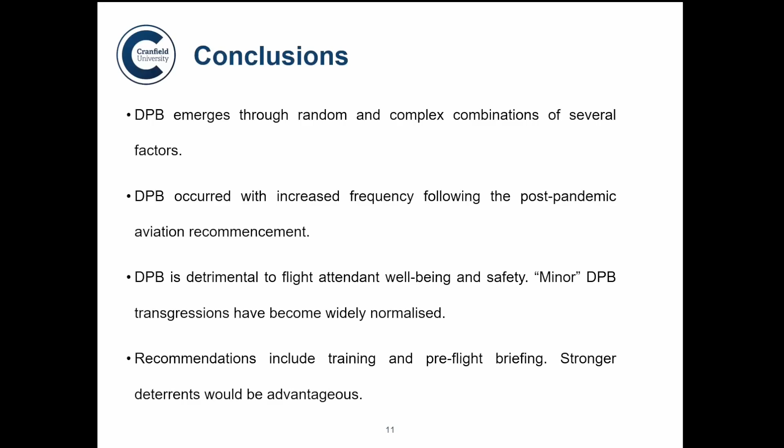We found that these disruptive passenger behaviours occurred with increased frequency following the post-pandemic aviation recommencement, and we found that these behaviours were detrimental to flight attendant well-being and safety. Furthermore, minor transgressions appeared to have become widely normalised and downplayed by cabin crew. And there were a lot of discussions and recommendations around the improvement of training and pre-flight briefings, and that stronger deterrents would be beneficial in deterring potential perpetrators.

Just to finish this presentation, I'd like to discuss some future research we're looking at in Cranfield. So there's some excellent research that's been done in Trinity College, looking at mental health and well-being and burnout in the pilot population, and following on from this qualitative research with cabin crew, we really need that level of research to be applied within this population as well. So there's a demand for that in order to ascertain whether the results we get from these qualitative studies can be extended to a wider population. So that research is really important, and hopefully we'll see some advances in that area in the years to come.

In terms of trying to provide better support, not just understanding the problem, a few areas that are of interest to research at Cranfield and in Europe are looking at, firstly, how you support cabin crew to deal with chronic stress, dealing with continuous exposure to non-compliant behaviours from passengers.

So we've done work at Cranfield looking at how we might be able to support pilots in this regard with chronic stress, looking at how you might be able to give them training in psychophysical resilience and coherence training. So that would be an interesting area to explore here, to helping cabin crew deal with that chronic form of stress they're encountering through dealing with passengers and non-compliance.